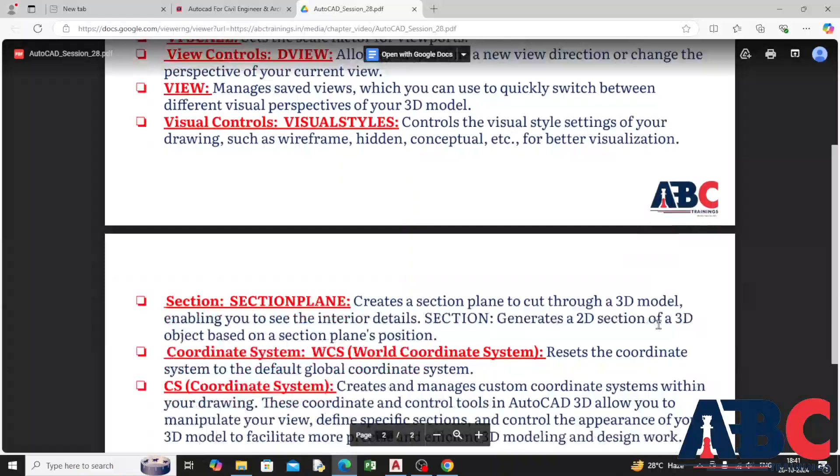The visual control style sets your drawing, such as wireframe, hidden, conceptual, or realistic, for better visualization. Then the section plane lets you cut your 3D model, enabling you to see the interior details. Then the next is coordinate system, that is world coordinate system.

Then if you want to reset, you can reset it. Then the CS, that is coordinate system, lets you create and manage custom coordinate systems within your drawing. These are the coordinates and control tools.

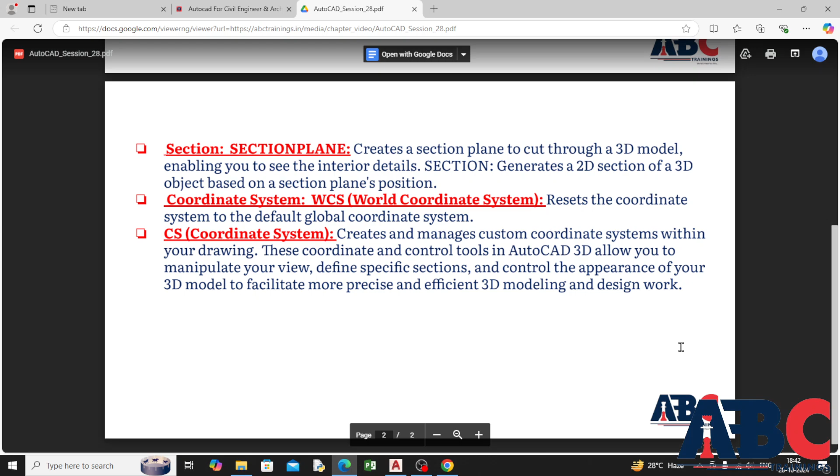These tools in AutoCAD for 3D allow you to manipulate your view, define specific sections, and control the appearance of your 3D model to facilitate more precise and efficient 3D modeling design. I will show you how to use this in AutoCAD.

This is my normal coordinates now available to see here. This is my normal coordinates, that is x, y, z. I have set it for world. Now I'm going to draw something here.

So you can understand easily, I will use primitives so I can draw fast. There are many parts I'm going to tell you, that's why I'm creating these things so far. I will show you how to use this. Now I'm going to change my coordinates.

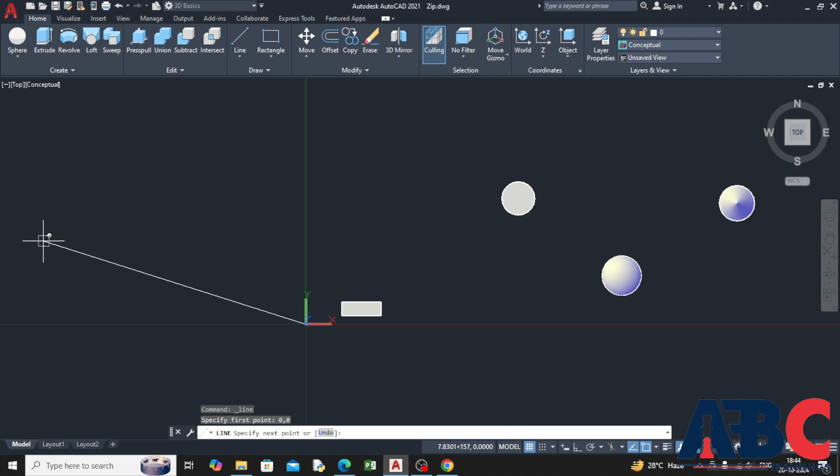First I will tell you what coordinates are. The coordinates we use are similar in 2D and 3D, I will show you. First, line 0 comma 0, enter. This is the zero of my world space. This side is negative, this side is positive, this is positive and negative, and this is negative and positive. You can see the coordinates changing, that's why I wanted to tell you this.

Now I'm going to change my coordinates. How can I change it? First, this is the world coordinates, then I want to rotate it on x. I'm going to rotate it on x. In this direction the coordinates are changed.

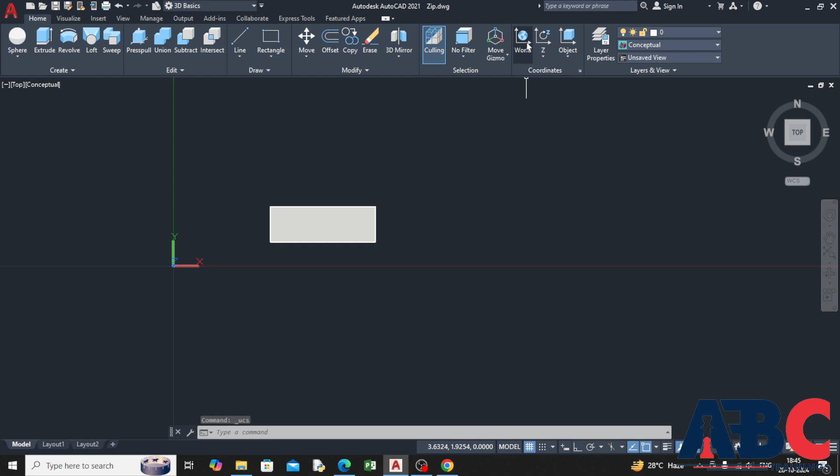If I want to change in the y direction, the y direction changes like this. Then I want to change in the z direction, this is my z. You can change it this way. Earlier x was in this direction. If I click simply on world, it will become our world coordinates.

This is the coordinate panel available here. Then the next is 3 points. I'm going to change my 3 points. Now my 0,0 will come here. Understand?

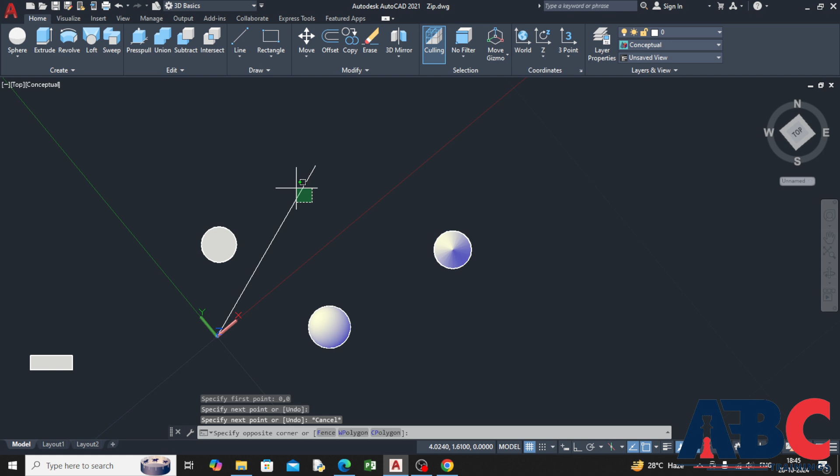Previously my 0 was near this box, but now I have changed it. The next is previous, look how it looks in previous. And the view, I'm going to give the view to this coordinate.

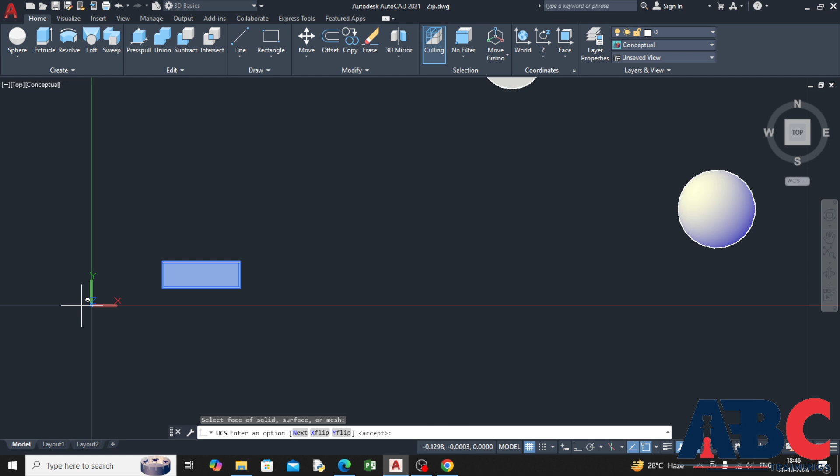Then the face, whichever face you want, this face. Now this is my coordinates in this face. And then the object, I'm going to define my object. This is my object I have defined. Now it means zero will start from this object. If I want previous or world, see, like this.

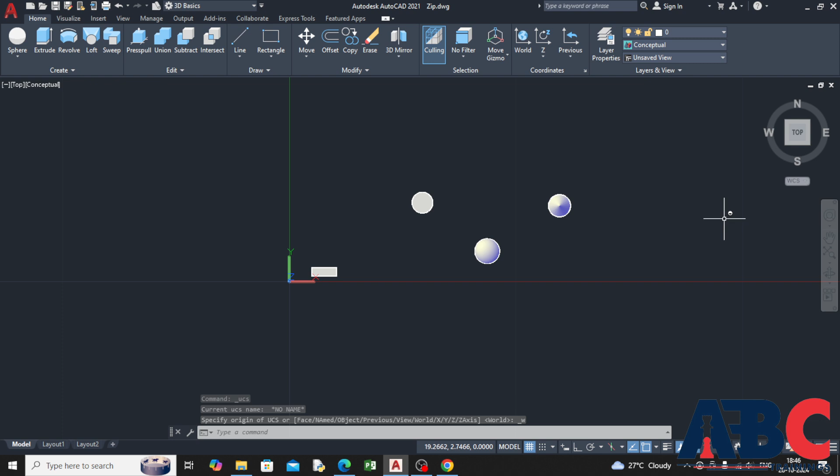Then the next is views. The first one is 2D wireframe, it looks like this. Then next is conceptual.

Then hidden, realistic, shaded, shaded wire, shades of gray, shaded with edges, sketchy, then wireframe, and X-ray.

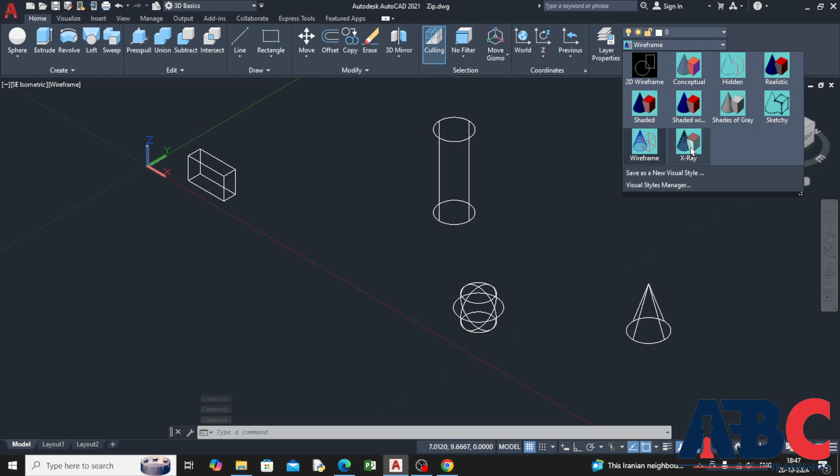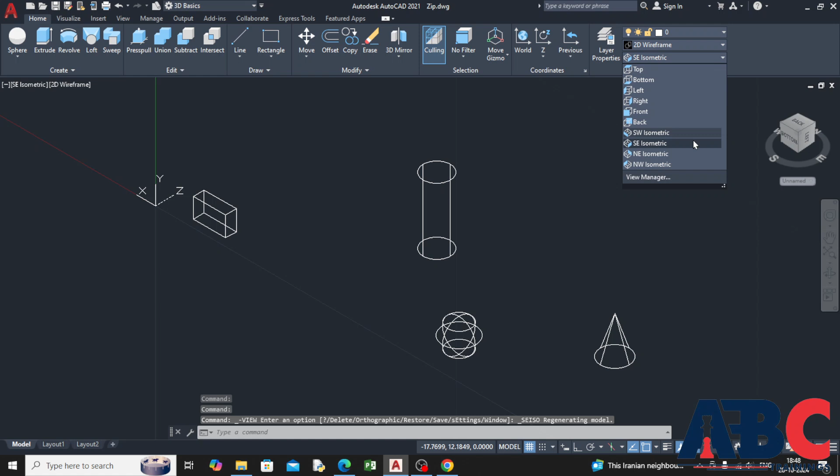Then next is unsaved view, that is top, bottom, left, right, front, back, southeast, southwest, northeast, and northwest. From here also you can change it.

Hope you guys understood what coordinates and view are.

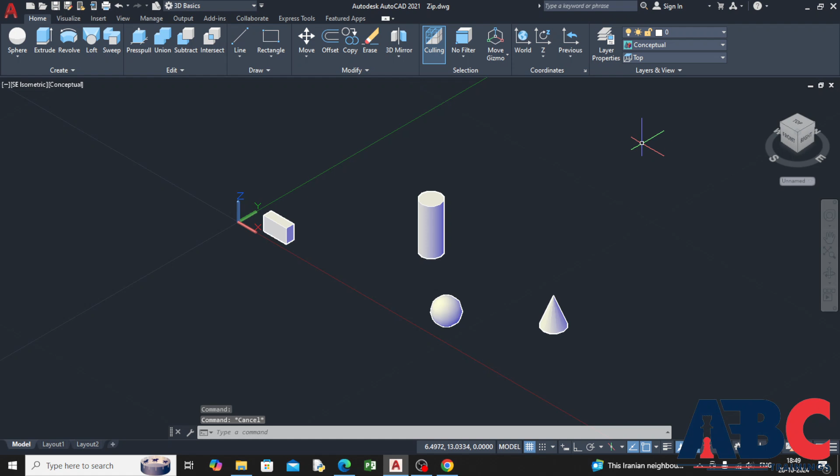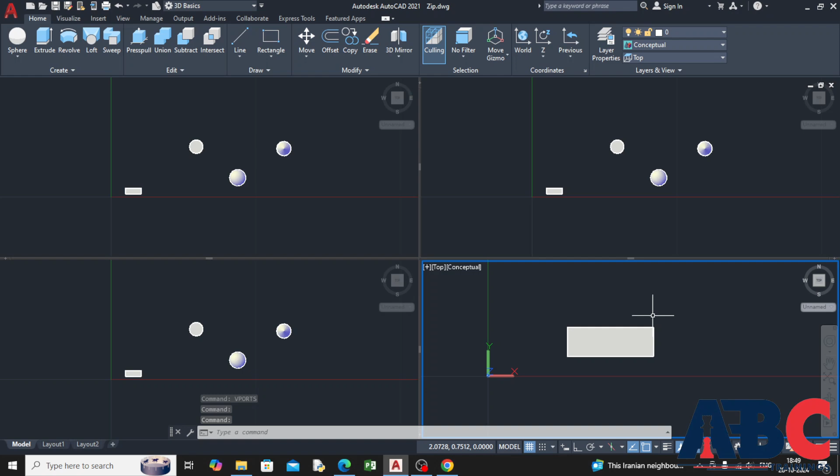Now I'm going to tell you about viewports. Come to top, viewports. We're going to get 1, 2, 3, 4, that's why taking 4 equal. Now I'm going to see one particular drawing at one time, that's why I have taken 4 objects. Now I'm going to see this.

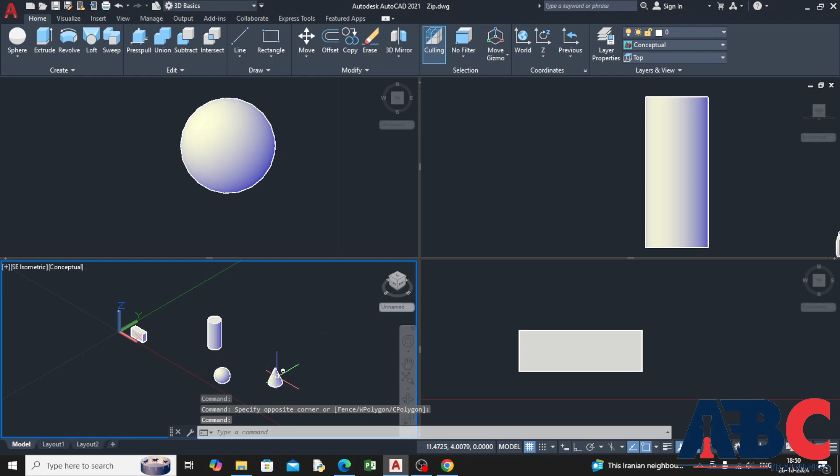Okay guys, hope you understand how to use this in MSLTSCALE. Enter your scale, now I am going in mm. You can add your own scale.

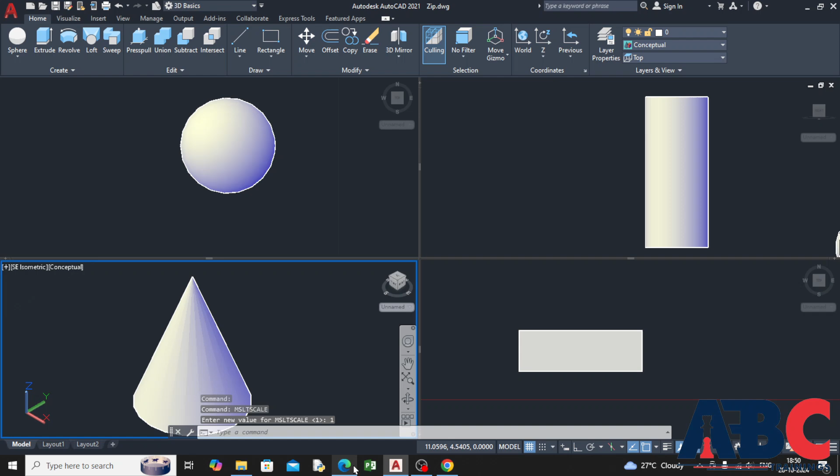Hope you guys understand how to use all the commands and all these points. Okay, thank you.